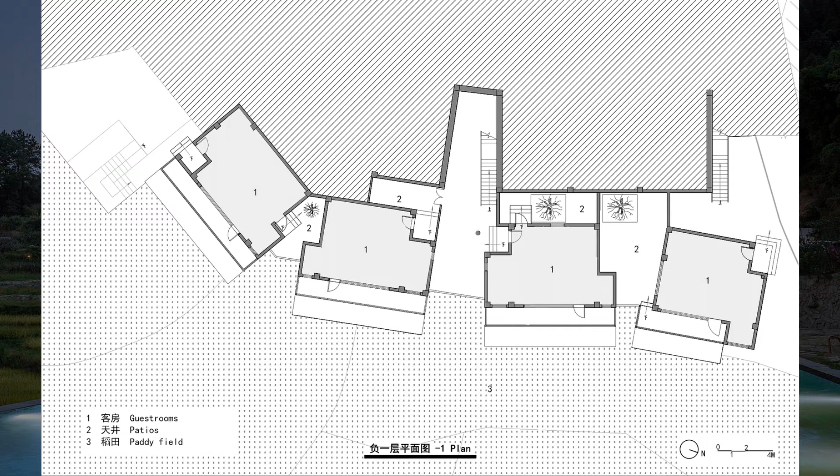At the beginning of the design, the architect hoped to build a small building on the east side of the site, at the gap of the mountain. On the one hand, it could play the role of scenery staffage. On the other hand, it could provide guests with a foothold to watch the sea of clouds and sunrise and to overlook the county. The building is selected to be built on the edge of the paddy field.

In order not to damage the overall landscape of the paddy field, the architect uses the elevation difference of the terrain to bury the building underground and hide it in the paddy field. The architectural form should be as simple as possible, and the plane should be in the form of a broken line, which should be buckled into the site. Single slope top, concrete structure, and floor-to-ceiling glass windows of the facade facing the cliff mouth keep the indoor and outdoor transparency of the building.

The roof adopts counter beams, and the indoor ceiling is kept level. Instead of using conventional roof treatment, rice is planted in soilless culture on the roof and, meanwhile, the counter beams become the partition to keep the water surface. The rice on the roof is integrated with the paddy field around the building, which makes the building invisible and gives the building a distinct personality.

Next to the restaurant, a small outdoor spa pool has been added at the request of the owner. The spa pool is located at the mouth of the cliff with an amazing view. In the early morning, the restaurant and the spa pool face the east, which is the best place to welcome the first ray of sunlight at sunrise. In the evening, through the warm lights in the restaurant and the candlelight on the outdoor platform, a romantic atmosphere arises spontaneously.

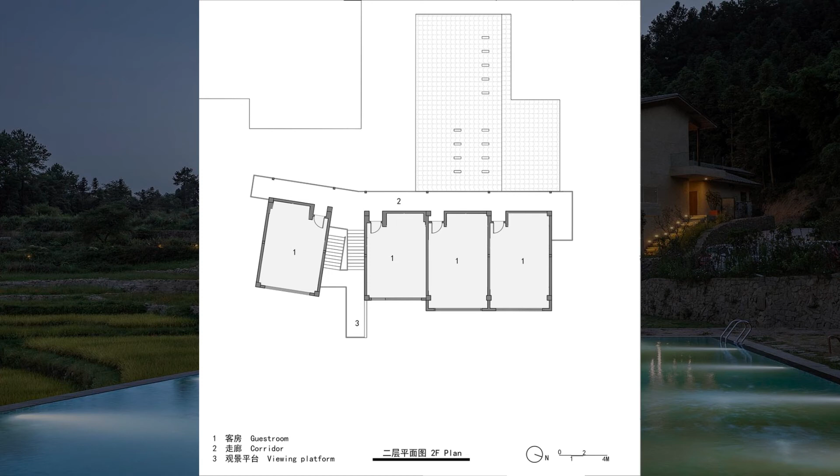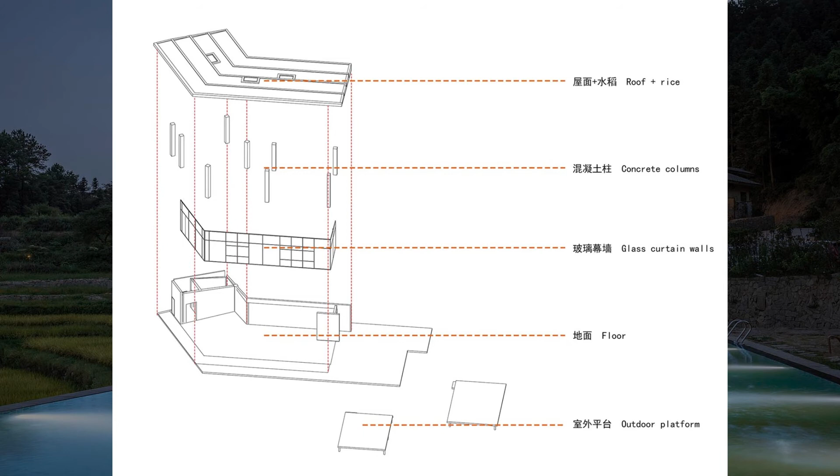The paddy field is completely preserved and the original road between the village and the paddy field has been moved to the west side of the new building to connect the building and the paddy field. More directly, the newly opened walking path connects several buildings, which follow the original ridges and forest paths. The road surface is not completely flat. The main road materials are stones and rootstocks, on which people need to walk at a slower pace and watch their steps.

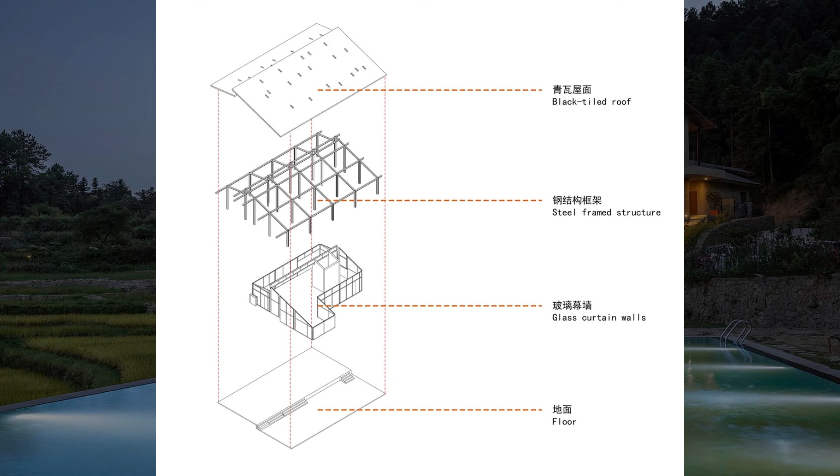Most of the areas around B&B and public buildings are paved with hard materials, including mainly local bluestone or the cornerstones left by the old buildings in the site, which have both local characteristics and a touch of nostalgia. At night, the light to illuminate the path is provided by simple light bulbs, which are installed on low bamboo sticks inserted in the roadside rice fields. There is a simple bamboo lampshade on the light bulb, which is used to cover the light bulb and let the light flow out gently.

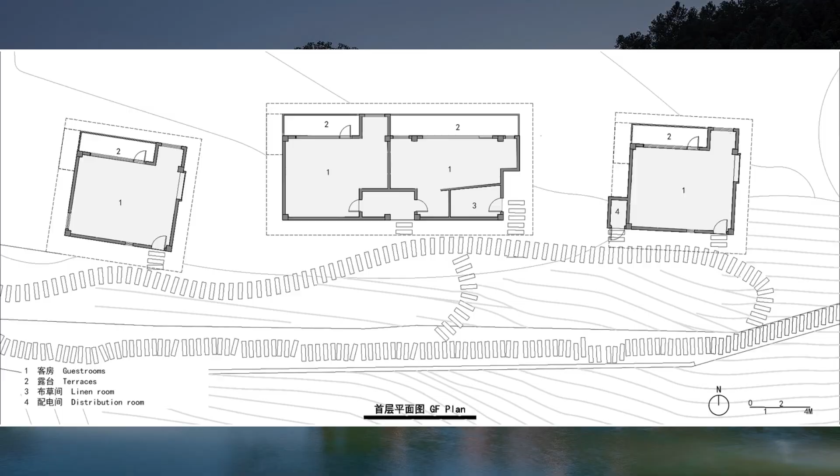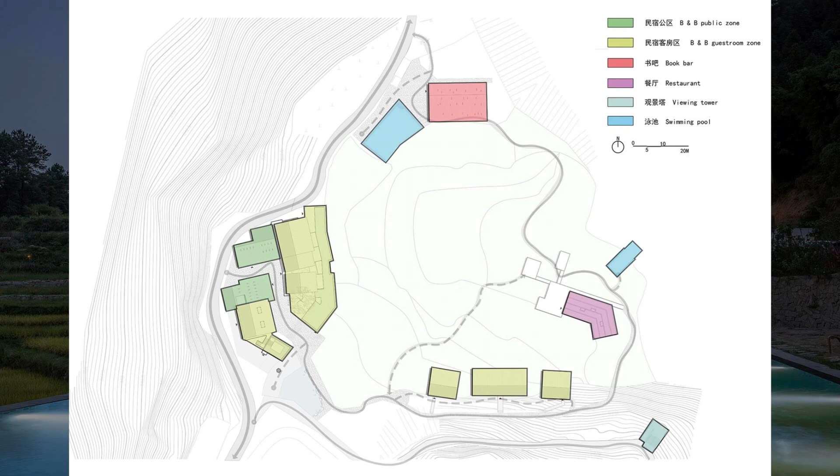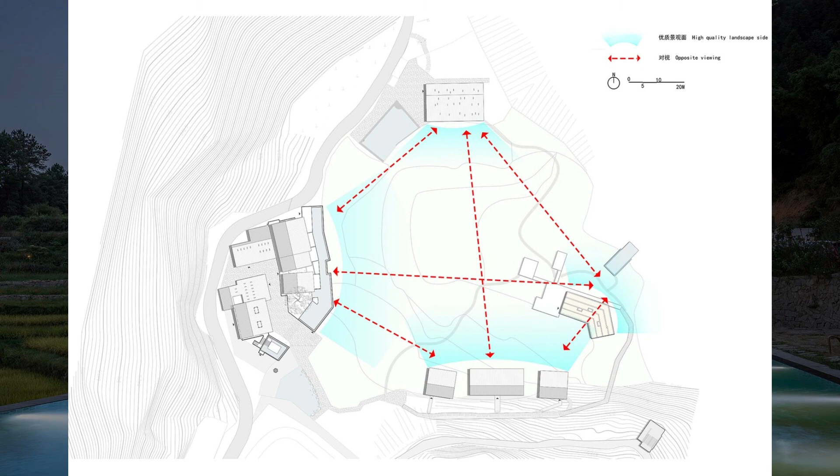Finally, there are people who wander between architecture and landscape, from the dichotomy of subject and object to gradually becoming a part of the landscape. As time slows down, nature, architecture, and man become one unconsciously, which may be the realm of man in mountain, the recluse pursued by ancient Chinese.

After its completion, relying on the superior natural environment, Dianjiang Bagu Suji has become popular rapidly. It has caused a lot of repercussions in the industry and become a punch-in spot for tourists. The mode of using idle assets in rural areas and activating them with new formats and design has become an important case of the local rural 3 changes reform policy, which provides a certain reference for the local rural development. This is also the result of the cooperation and joint efforts of the government, the owner, the operator, and the designer.